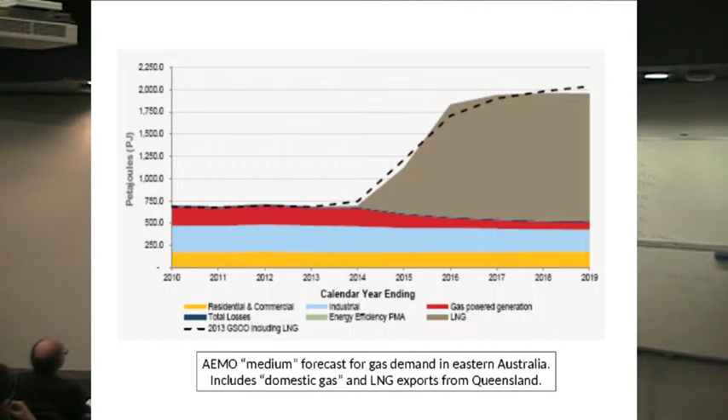Here's another one that talks about actually using hot water heat pumps to heat your hot water, as opposed to a reverse cycle air conditioner, which is your space heater. And that's also been very popular on the conversation. I'll come back to that probably.

This is for tonight. Or that's the radio show. So again, I just did the BZE radio show on it, broadcast on Friday. So you can listen to a podcast there of the radio show about economic fuel switching.

And what do I mean about economic fuel switching? These are the key points, so I want you to memorize all these. Gas prices in Eastern Australia have gone up and may continue to go up. The amount of gas used in Eastern Australia - and I'm just talking about the gas used in Eastern Australia, not the stuff that's being exported from Queensland these days.

That peaked in 2012. By 2025, demand could fall to half of that peak. AEMO is no longer raising red flags about gas supply shortages.

Ballpark numbers: it's possible that Victorians alone could save $250 million a year on their heating bill from where they're at right now. And people I see on the train, folks I know from the Bayside Climate Change Action Group or whatever, green as.

It's like, tell them what I'm doing. And what do you heat with gas? Do you got a reverse cycle air conditioner? Where is it? It's in the lounge room. Is it a pretty new one? It's pretty efficient? Yeah, I bought a good star rating. Do you use it for heating? No. So they just haven't twigged that they can actually save a lot of money.

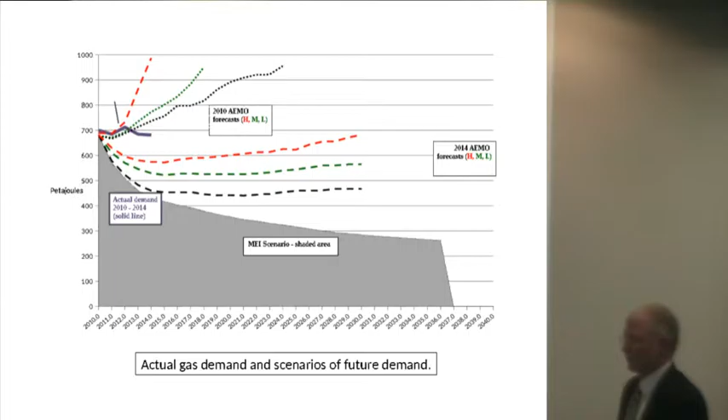I'll go through that in a lot more detail. Heat pumps, such as they are, are a disruptive renewable energy technology, and our report says that we're actually recovering more renewable energy with heat pumps in Australia than from rooftop solar PV. Nobody worked that number out before. Twice as much. And it could double again, just as people learn and start using it, then it could double again and be way ahead of rooftop solar PV.

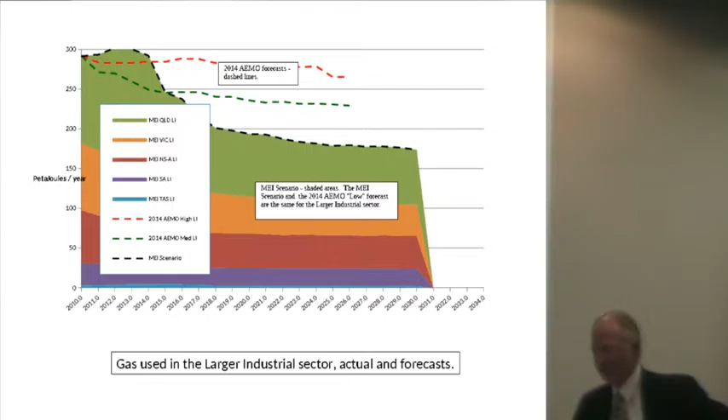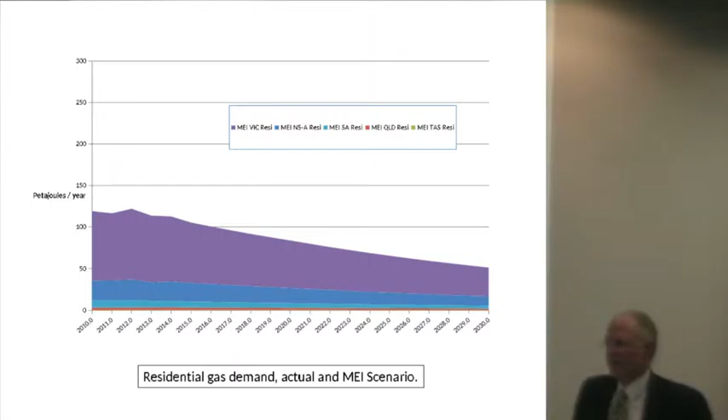I call this economic fuel switching. So if the economics are there, that today you should switch to this other heating device that you have in your home, I call that economic fuel switching. A lot of people run around talking about renewable energy, and this annoys the people that are keen about energy efficiency. So I've trained myself to always put the words energy efficiency in front of the words renewable energy. But now I'm saying economic fuel switching, energy efficiency, and renewable energy.

When you think of how gas use in buildings could be reduced very quickly in Victoria, we're not going to do it by insulating ceilings and attics. We will continue insulating attics, we know there's a lot of attics that still need to be insulated. But what could change really overnight is just people getting the word that they need to turn on their air conditioners. So here's the key message for tonight: turn on your air conditioner.

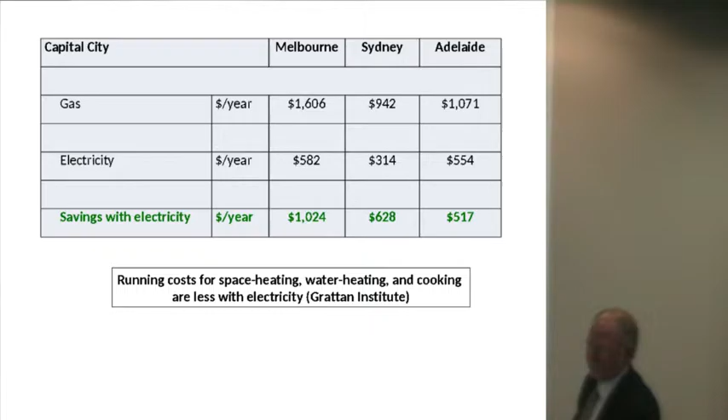The ATA had already published a report last year, and Craig Memery was here, and he presented on it in this group, that there's no economic need for any new house to connect to gas, and no economic need for any new suburb to be connected to gas. But what the ATA missed when they put their report together, they were looking at what do I do if I'm building a new house, or what do I do if my heating system's stuffed and I want to replace it. They completely missed the message that you can go out tomorrow and turn on your air conditioner and start saving. Maybe they were thinking we all knew that already, but there's millions of people that don't know that.

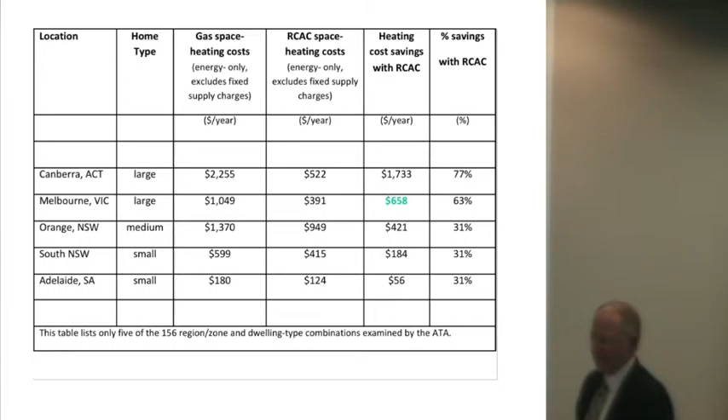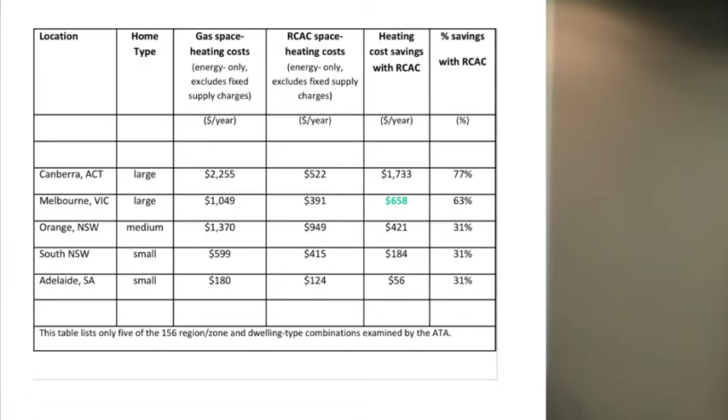So the ATA totally sailed through that. They had the numbers, and so I worked with the ATA on this project, and we got the numbers and put them in our report, but they'd never been published before. So this thing the Age picked up on, that the large Victorian home could save $658 a year by switching over to reverse cycle, that comes from the ATA report that was published back in October, November.

But there's another problem with publishing a report that talks about home heating in October, November - nobody cares. So we're lucky we got involved here as it happens in wintertime, and so people were interested. We almost made it onto television, etc., but by the time we got there, winter was over, and so Sunrise said come back next year. We don't really want to run a program rubbing people's noses in the idea that they could have saved money last winter. So there'll be more next winter.

There's no need to expand the gas grid to new suburbs. Actually, people can start looking at cutting gas infrastructure costs. BZE's been talking for a long time about homes completely coming off gas.

A lot of people talk about getting off the electricity grid, but I don't really know many people doing it. But I know a lot of BZE people who are coming off the gas grid. So as more and more people come off the gas grid, that means it's more expensive for those who remain behind, since they have to pay the bill for the fixed charges.

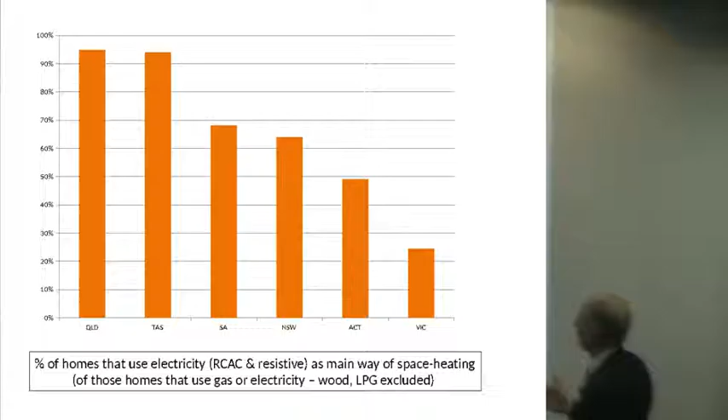You can call that the death spiral of a utility, where people leave using that utility and it drives the costs up for others, which then drives more off, and so forth. So that's something the operators of the gas grid need to be concerned about, that there's a death spiral coming.

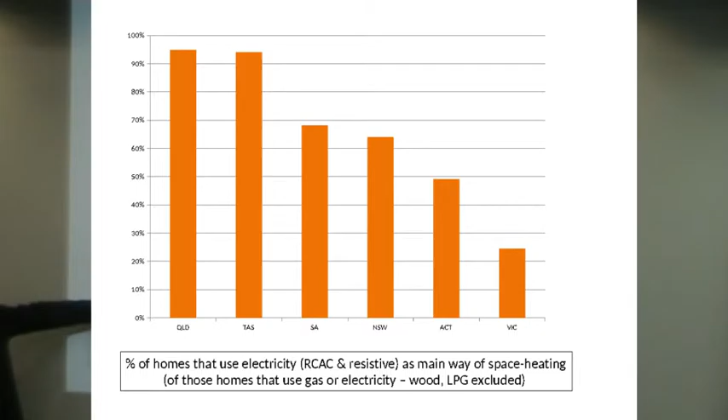We can explore for gas in the farmlands of Victoria and other places, or we could explore for gas in our lounge rooms and attics via economic fuel switching and energy efficiency measures. This actually adds up to big numbers.

And if industry is concerned they can't get their hands on gas because we're exporting it all, when you look at the numbers of what we could stop wasting in buildings, that is a lot of gas that could be made available for industry.

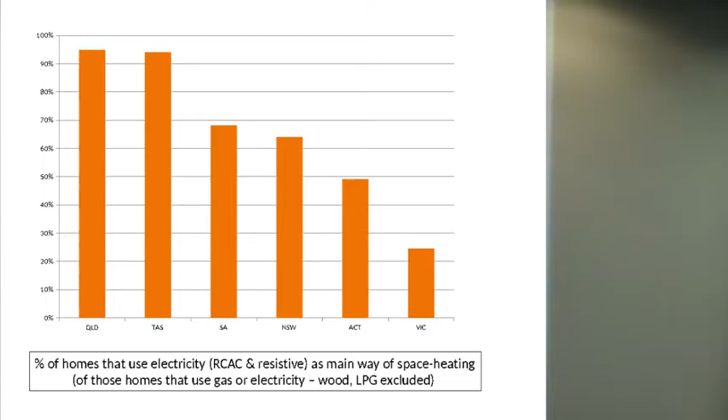You can look at gas reserves. There's the Bass Strait—will it last 20 years, 30 years? How long will that last? Some of AEMO's publications said it eventually runs out, so we should be thinking about developing new gas fields.

Well, if you use less—if you thought you were going to use a certain amount of gas by 2032, but you're using a lot less—will those same reserves stretch out for another 10 years or more after that? So I can show you a chart on that.

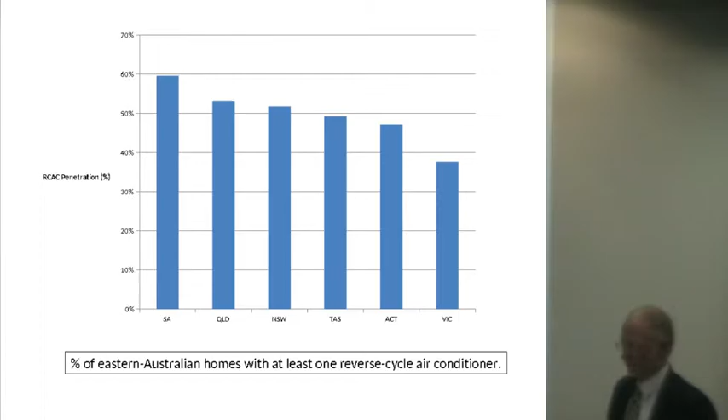What this means is these days we need an integrated resource plan. We can't just look at the supply side for gas. We need to also look at what can be done on the demand side. How can we reduce demand? How can we save people money? How can we make their homes more comfortable and save them money?

So you need to look at gas and electricity in an integrated way, because this fuel switching is going to happen. Yes, as people turn on their air conditioner, they've reduced their gas use, but they've increased their electricity use. So the planners of these systems need to think about this in an integrated way.

Overseas, it's known as an IRP, or integrated resource plan. So that's what we were talking to the government about today. So those are the key points. Hope you've memorized them all.

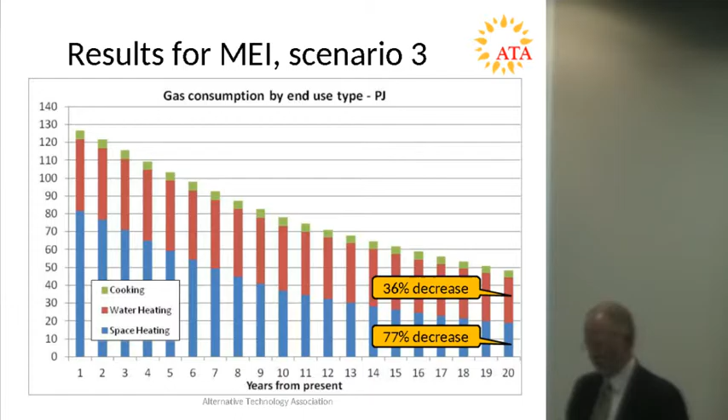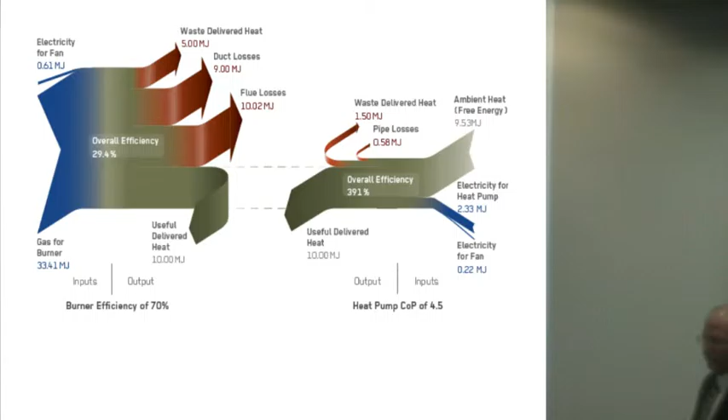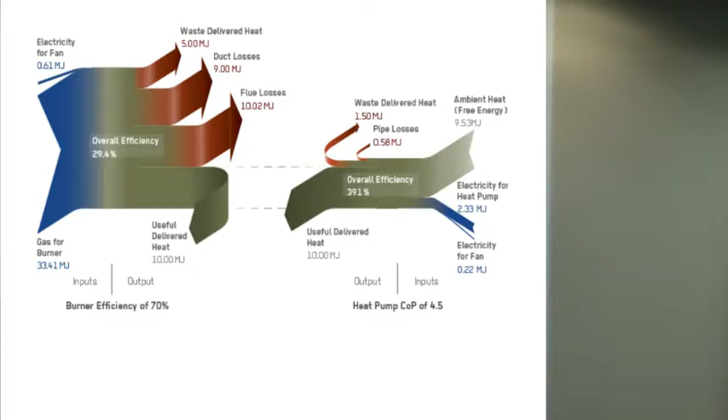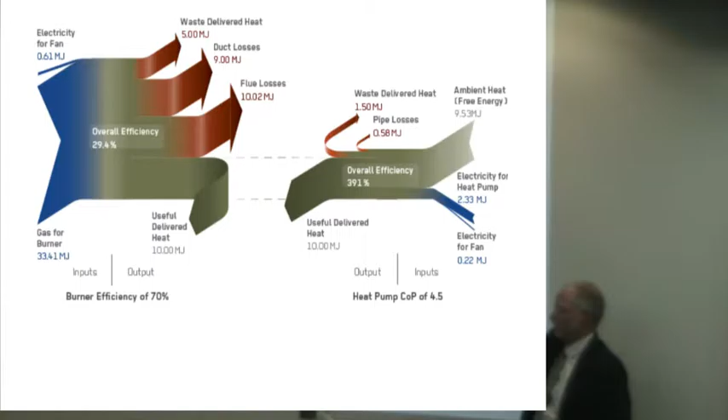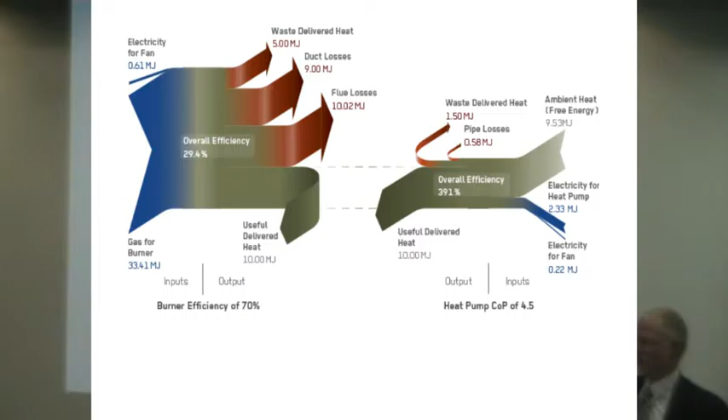This is a big potential political story, because electricity prices were in the news for a long, long time, but I can't think of a single person that lost their job because of higher electricity prices.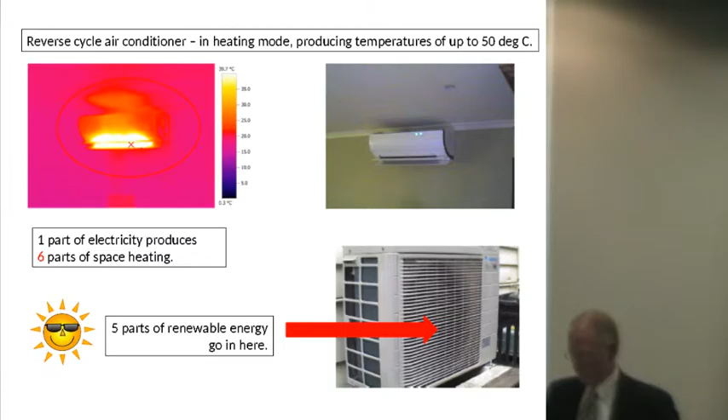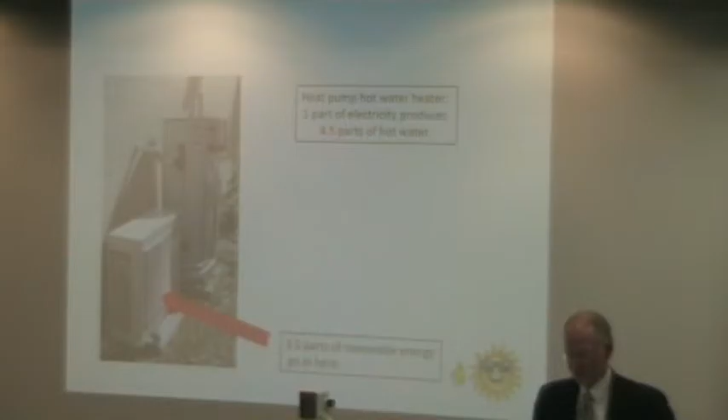But a question we often get is, hold on, reverse cycle air conditioners harvest renewable energy, but they still use some electricity. What if that comes from brown coal? Is that better or worse than gas? What this report showed is that as far as reverse cycle air conditioners go, with the assumptions the ATA made about efficiency - using a 3-star unit, I think - you have lower greenhouse gas emissions using the electric reverse cycle air conditioner than you would using gas.

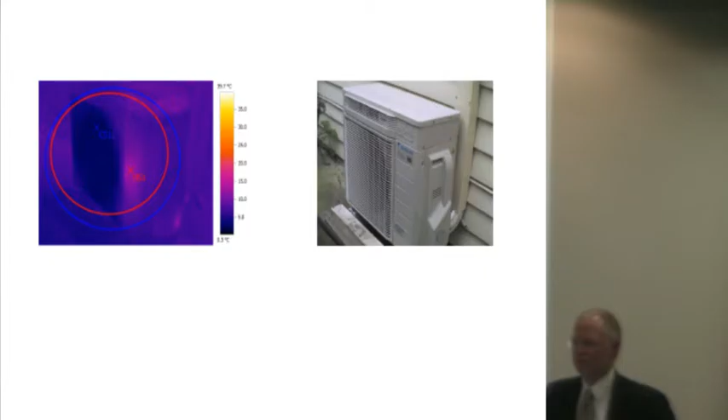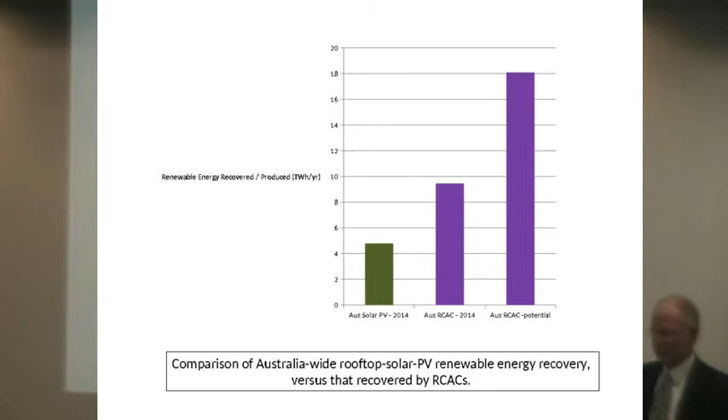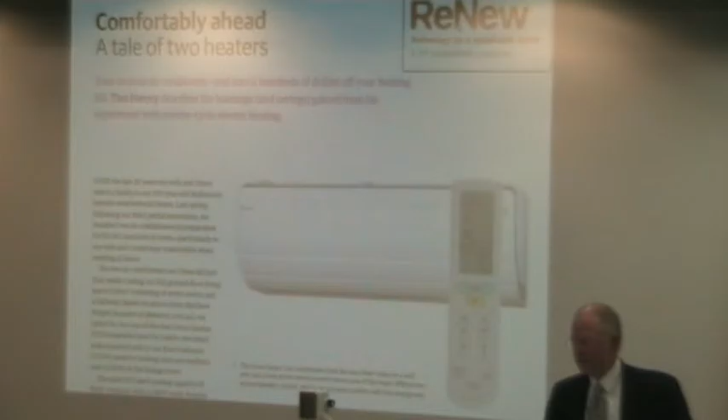for all those homes that use electricity or gas for heating, I put wood to the side and didn't count LPG. What you find is that homes using gas or electricity for heating in Queensland, 95% of them are using electricity. Tasmania is nearly the same, using electricity and not gas for heating. A gas pipeline went down there in recent years, but not too many people have tapped into it, so they're happy using electricity.

And they're all across the use of reverse cycle air conditioners. When I talk about this, Victorians don't understand it, or Tasmanians say, well, what are you talking about? We've been using heat pumps for years, so no news here.

We actually subcontracted the ATA to do some modeling as part of this study because they had this model set up to look at a new home or a new suburb. We said, hold on, can we use that to predict this so-called instantaneous economic fuel switching, when people go home tonight and turn on their air conditioner? It's always fraught doing those sorts of forecasting calculations, but we went ahead anyhow.

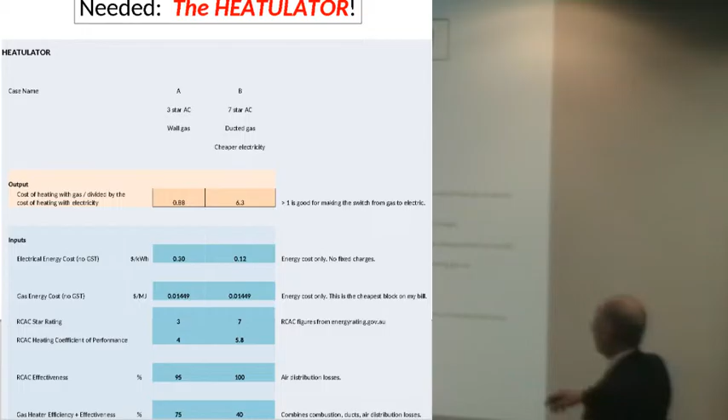Again, those sorts of things could be dealt with if people had some knowledge that they should plan ahead, get some quotes, and be thinking, gee, my hot water heater's pretty old, I wonder what's the best technology to use. As we see more people with rooftop PV, they may start to think more about using their excess solar power, either via a heat pump or resistive water heating, to go all electric. But people need information and an idea that they should think ahead - more of the work from the ATA.

But this is the sort of modeling that even the Australian Energy Market Operator is not doing. So I encourage them to try and do this sort of bottom-up modeling where you try to work out just what do people have in their homes today and how might that change in the future.

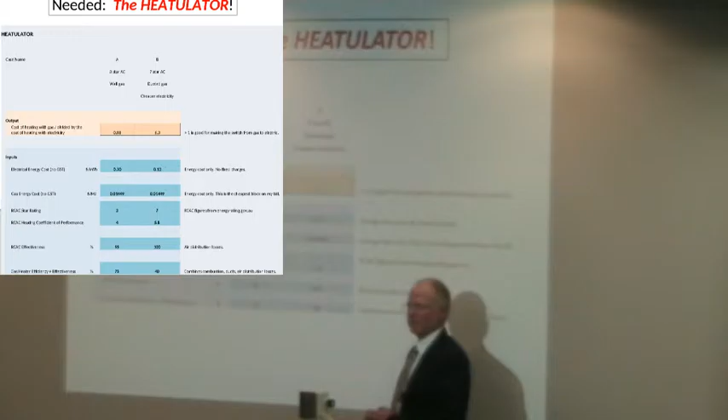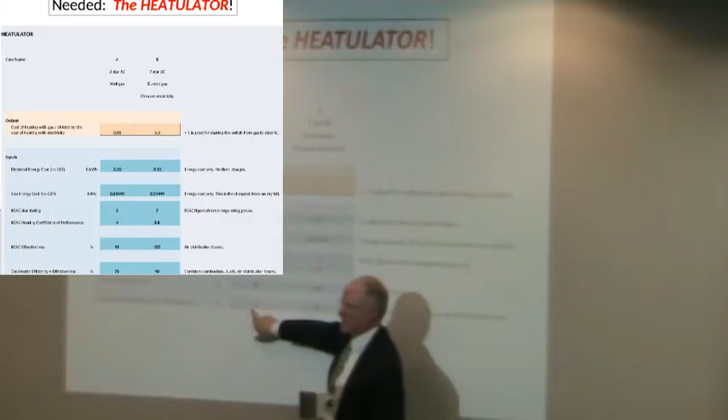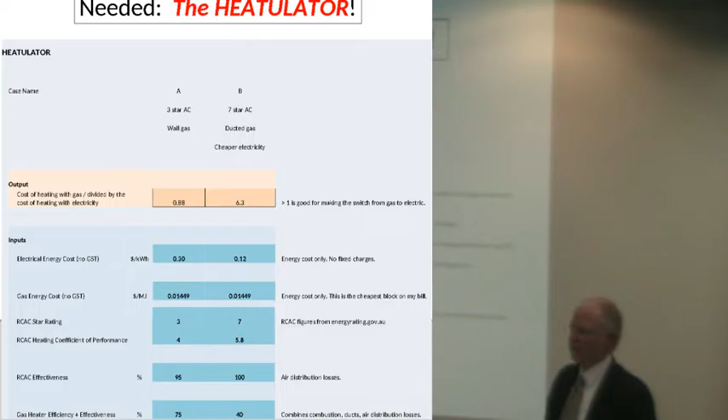Now, this is gas. Generally, it is cheaper than electricity, but not by a factor of 13. Maybe more like a factor of 2 or 3 or 4. So it's this big efficiency advantage for the reverse cycle air conditioner that means, surprise surprise to a lot of Victorians, that it's a better way to go than gas.

And actually these days, you can find that gas no longer has a price advantage over electricity either. With the new feed-in tariffs being announced by various governments at like 5 cents a kilowatt hour, that means electricity is just about the same price as gas. So there is no point putting your excess solar electricity out onto the grid if you're using gas. You need to find a way to use that electricity in your own home.

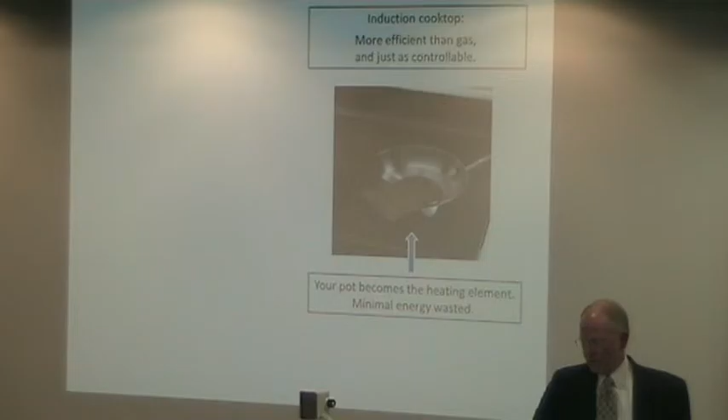And people will do that, particularly in New South Wales, where the feed-in tariffs are coming off straight away in 2016. And so I would expect people, if they have gas water heating, to be getting rid of that and saying, right, I can use my excess solar energy.

And a hot water storage tank is like a battery. What are you going to do with that excess electricity? You're going to buy a Tesla? Maybe not. You're going to buy a Tesla Powerwall for your garage? Those aren't actually really terribly available right at the moment either, and maybe not that economic.

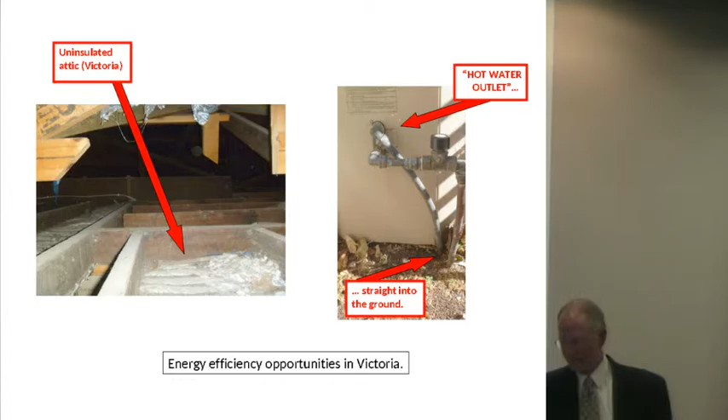But you can certainly buy either a resistive hot water storage system or a heat pump if you're willing to spend a bit more, and that's a way of storing your energy. So you would set those up so that the water gets heated in the middle of the day, and it's a way of storing energy to the next day when you have a shower.

That came from the buildings plan. This is part of the problem with ducts, and I probably presented this before, last time I talked about thermal imaging. But this just showed we got under a person's house, and here somebody's crawled over the duct and smashed it, and here the duct is just opened up. It turns out this home operated this gas system in this situation for probably about 10 years, because the kid that went under the house fessed up to doing it 10 years before.

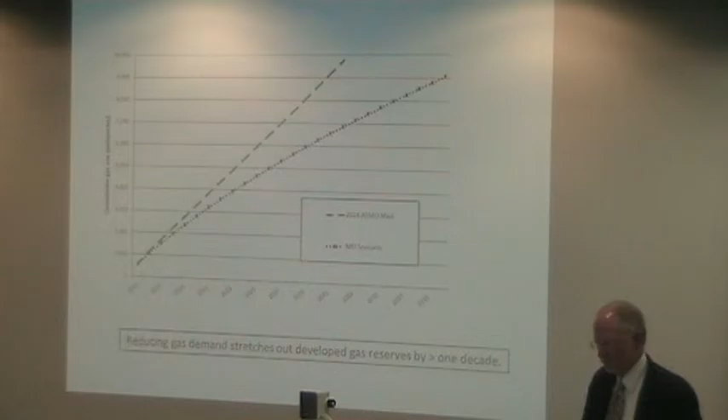And so they would have just been blowing hot air under the house. And that's the problem with ducts: unless you can inspect them and protect them and make sure they're in good nick from the beginning, they can become a disaster. At best, they waste a lot of heat because they're never that well insulated. And at worst, you have this sort of thing going on.

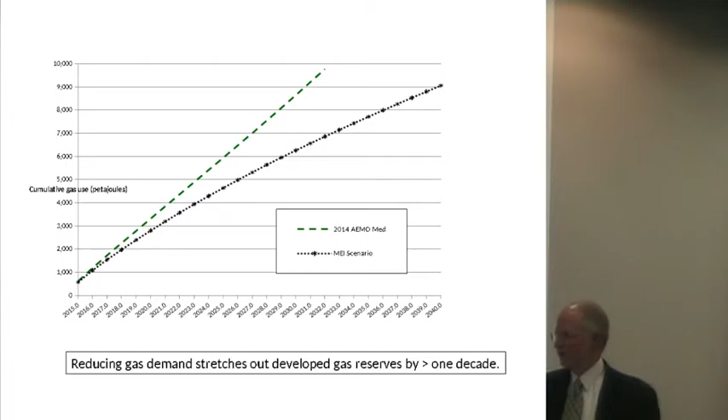My unit's actually rated for 20 below. I was up in Jindabyne skiing the other week, and at the Jindabyne Caravan Park we got outside and it was minus 8 degrees outside, but we were in the caravan cabin the night before, and it was being heated quite successfully by a pretty crappy looking reverse cycle air conditioner, which was obviously functioning at minus 8 degrees.

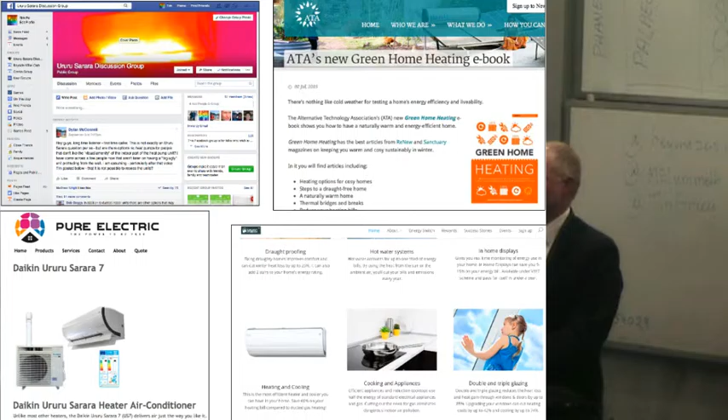Information sources: we have an Ururu Sarara discussion group on Facebook, feel free to join. Ururu Sarara is the name of that 7-star air conditioner, but the discussion group is really about running your home with gas or electricity. We gave it a nice name so you could find it, but we talk about more than just the 7-star air conditioner. The ATA has launched an ebook, Green Home Heating, for about $5 if you're a member, combining all the different articles written in the past about that topic. There's also BZE and Energy Freedom, and Matthew Wright, who some of you would know - he's trying to start up a business called Pure Electric, where he helps people move to electric devices, such as the air conditioner. So there's all sorts of different information sources out there these days.

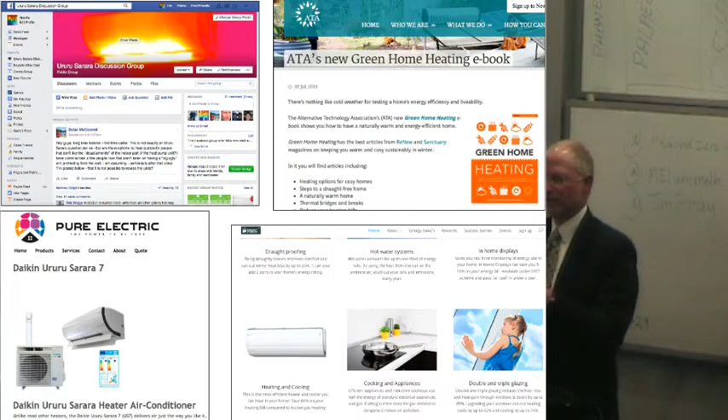Question: do you think the death spiral in gas will negate the death spiral in electricity? Will the death spiral in gas stop the death spiral in electricity? Yeah, I see a lot of potential for using more electricity. Absolutely - if homes were 100% electric, we'd be doing our heating with efficient electricity, our hot water heating, the cooking. There's the electric car too. Of course, a lot of that can be self-generated with people putting solar panels on their roof. But sure, I see that.

Recently we had a peer-reviewed paper published in the Electricity Journal. Alan Pears, Mike Sandiford, Dylan McConnell and myself got a paper published talking about the recent history of electricity in Eastern Australia - 5 years of declining electricity demand in Eastern Australia. But in that paper we talk about how it could turn around if homes use more electricity in the ways we've described.

Electric vehicles, of course, and industry can do a lot of economic fuel switching. You don't need to use gas in a dairy or for food processing, and Alan, perhaps you can talk about heat pumps in industry - you can take this heat pump concept and not just use it around a house, you can use it in industry, it's a refrigerant cycle basically, and get to even higher temperatures. So there's opportunity for fuel switching to occur in industry, which could increase electricity demand.

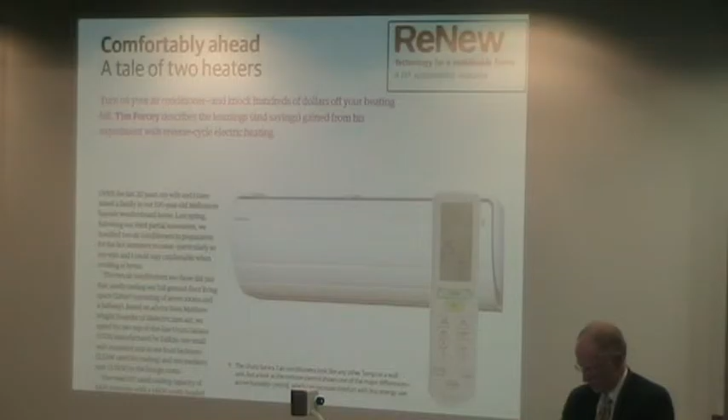Matthew Wright played around with the phrase heater air conditioner for a while, and I couldn't really get that to stick, so I've just gone with reverse cycle air conditioner. People do know that reverse cycle air conditioners are heaters, but they never use them for heating, because they think gas is cheaper.

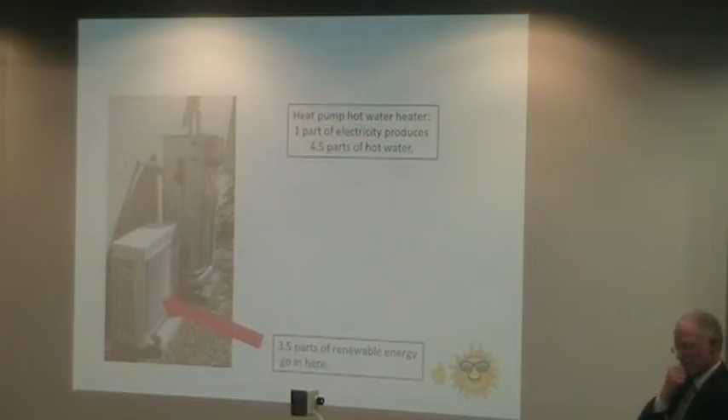So we'll just go across the room. You mentioned about getting RECs for a heat pump hot water system. At the moment in Victoria, you can't get VEECs if you're going from gas to a heat pump. You can get the federal RECs, but you can't get the Victorian certificates. What I was advised by my installer was to buy an electric hot water service on eBay for $30, stand up next to it - that would be 100% legal, they can take that one away. But legally at the moment you can't get VEECs if you have gas at your property or you're changing the gas hot water service.

One of the faults we had, when we were meeting with the Energy Minister's Chief of Staff today, is he said, 'Have you guys submitted to this energy efficiency thing that's going on right now?' And I asked him, 'When's the deadline?' He said, 'Don't worry about it.' So we, MEI, need to submit, but I would encourage anyone who thinks they have the expertise to put some logic down on paper about why certain things should happen. I think this current state government is open to these things, but they do need to hear from people. Otherwise, like our report - we went in there today and they kind of vaguely were familiar with who we were and what we'd done, but nobody has time to sit down and read these things. So when something actually lands on their desk, then maybe it gets a bit more attention.

Speaking of submissions, I was wondering if you presented this information to the unconventional gas inquiry. Yeah, I did, sure. I testified - you're aware of implications of moving away from gas? Yes, I testified to a New South Wales inquiry in January, and they issued a report and referenced our work 28 times, because no one else was talking about demand.

I testified to the Victorian inquiry. They just released an interim report or draft report, and they mentioned our work once, which is fine, because in one sentence they summed up about five of our key messages. So again, no one else was talking about what we were talking about. Even the Australian Energy Market Operator, who are the official organisation responsible for demand forecasts, they didn't appear in front of the inquiry. And it's not like the inquiry has a team of researchers that goes out and pulls in stuff - they just listen to whoever fronts up in front of them. We had to put up our hand, but others didn't, so they don't even hear this information.

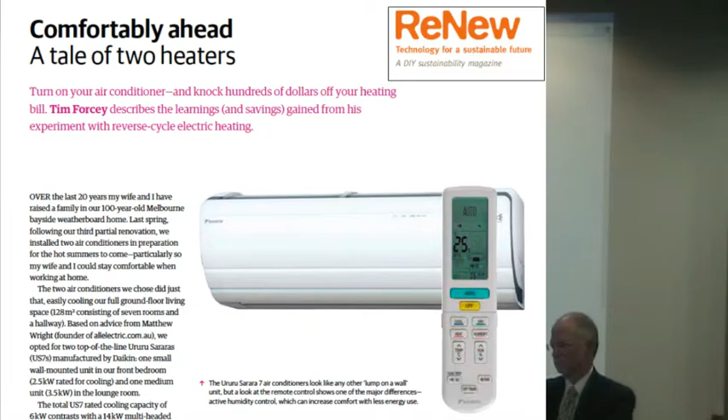Of course, coming back to the basics, the insulation, the window treatments, shading the house - all those things are important for bringing your heating and cooling costs right down in the first place. There can be a factor of 2, 3, 4, 5 difference between a home of the same floor space, depending on whether it's had any sort of thermal treatment. So that's always step one, and energy freedom talks about all those things - getting the building envelope right, draft proofing and shading.

One of the things you find - and my article coming out in Renew Magazine will talk about this a little bit - is you get folks to come around to give you a quote for air conditioners. The guy came around and gave me a quote, and he wanted to put in 14 kilowatts cooling. We ended up buying 6, which does the job.

Matthew Wright was on to me, and Alan Pears too - Matthew's like, Tim, in your house you're not going to need 14 kilowatts, you'll just need a little bit. So we put a 3.5 kilowatt cooling unit down in the lounge room, and a 2.5 kilowatt cooling unit up in the bedroom. That one in the bedroom can cool the whole front formal living area, and the 3.5 kilowatt out back in the lounge room can heat and cool the lounge room, the eating area, the kitchen, and send some heat up the stairs as well.

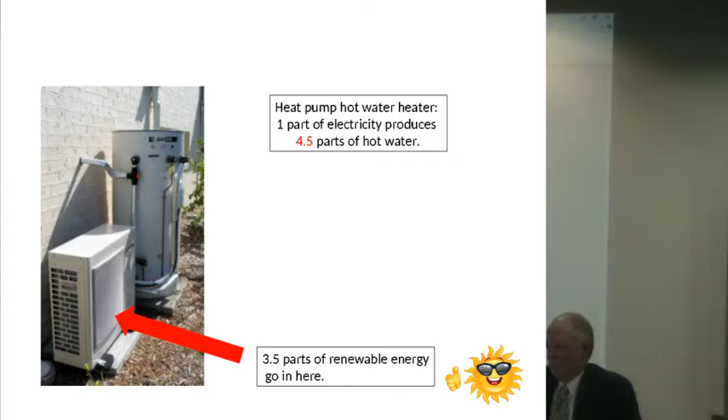Yeah, I guess you'd have to play around with that and see what works for you. I would say one thing about this particular device we're looking at here, there's a button you can push, and it can tell you how much electricity you've used since the period you've turned it on. So you could start to do some home experiments. If you had a few days in a row that were similar, you could try different modes of operation, keep track of how many kilowatt hours it's using, and then come to some conclusions.

Because across the room, the temperature can vary like 7 or 8 degrees. And when you've got the fan running high, it can vary like 3 or 4. So there's so many variables when you're trying to really get down to numbers. I've been running it all winter and I still know very little, I think, because there's so many variables and it's hard to really measure.

Yeah, and then this particular device throws in another variable, which is humidity. So this Ururu Sarara can actually add humidity in the wintertime using a desiccant wheel, which feels really nice and is a really superior form of heating. That's a whole other variable that next winter, if I have the time, maybe I'll do a whole other experiment and write a whole other article. So I think the ATA was a bit annoyed I didn't say much about humidity in this article, but you're right, there's so many variables, trying to sort it all out is a challenge.

In danger of getting a bit off topic here, Tim, have you got anything to say about using a heat pump hot water service to drive a hydronic heating system?

Yeah, right. So I've heard that sort of thing's possible, but I haven't done it myself. But there are folks that will sell you a heat pump to drive a hydronic system, and then you may think about integrating that with your hot water system. But I don't have personal experience on that. Let's see what the audience has to say about that.